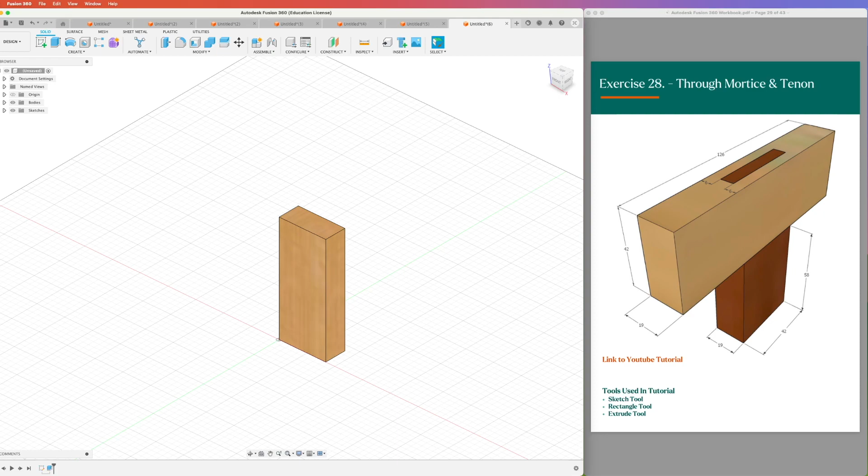So starting with our bottom piece, we're going to draw our rectangle at 19 and 42. We're going to extrude him up. And he's going to be 58 plus 42 high. And so that's our bottom piece. So I'm going to jump into bodies, right click and change his appearance now. Grab a darker piece, put him on there.

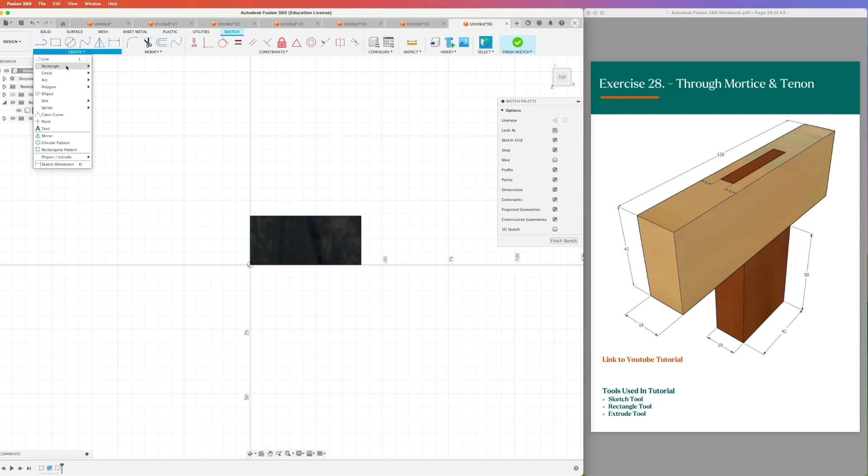I'm then going to use my tenon to cut out the mortise. So I'm going to sketch off the top here. I'm going to grab my center rectangle this time because it's a lot easier to draw from the middle out. We're just going to approximate the middle. And he needs to be 19 wide and 126 long.

Now he doesn't line up yet, so we're going to coincident this line with that corner. And then we're going to create the middle of this rectangle from the edge, needs to be 21, or 42 divided by 2. So now he's perfectly aligned in the middle. And we're just going to go and add

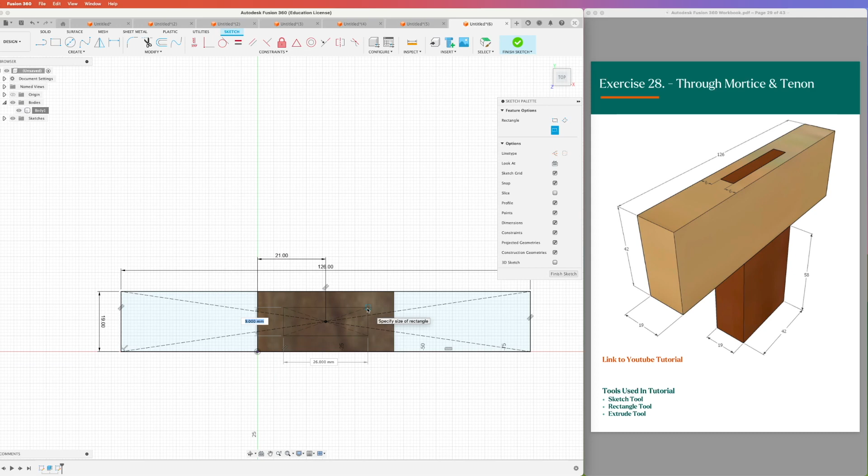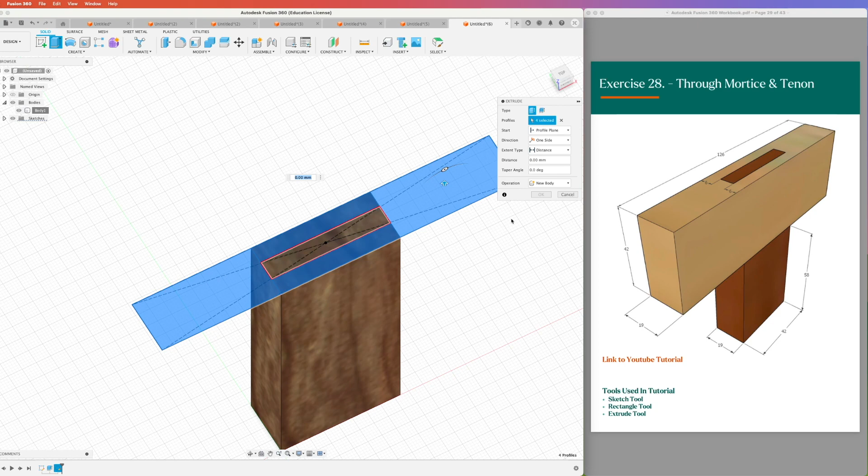our mortise rectangle now. So if I grab that, our mortise is going to be 42 long, and it's going to be 19 minus 6 wide. And so there will be my mortise. So when I extrude this, I'm going to choose this rectangle, extrude this one, and this one. And we're going to extrude down minus 42.

And we're going to create a new component. I could create a new body and then turn it into a component, but I might as well just create a new component and click OK. I'm then going to right click on body 1 and click create component from body. And now I have 2 components. And they're not actually assembled yet. So if I grab this and move it, you can see it'll go wherever it wants to go.

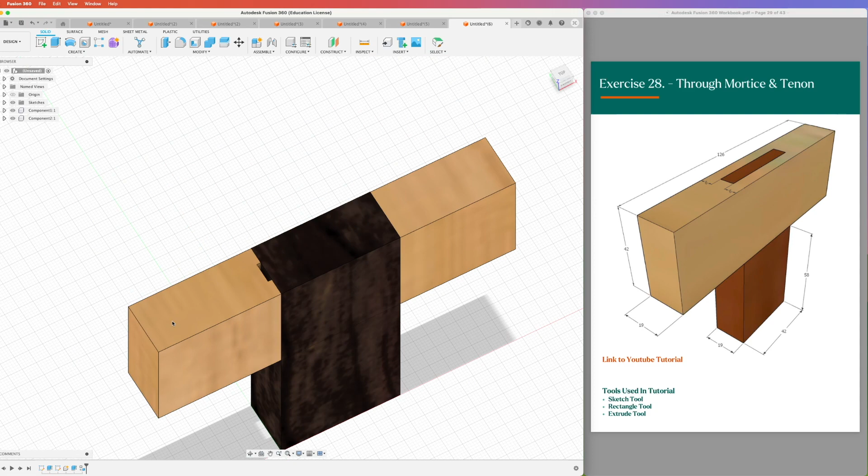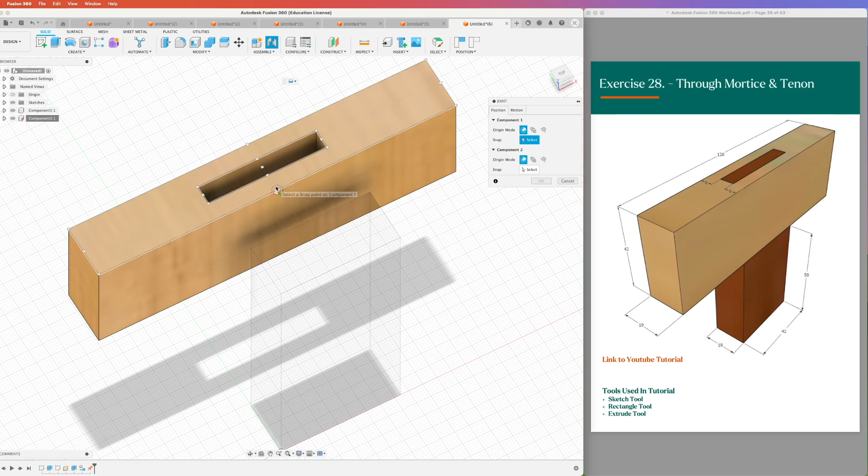So what I'm going to do is I'm just going to click on component 2, which is my dark piece. Right click and click ground. So he's stuck there. I'm then going to join this one to that one. So if I come into joint, I need to find some pieces that can line up. So I think I'm going to line up the outside edge facing up. So blue facing up in the middle of this piece with the outside edge in the middle with blue facing up.

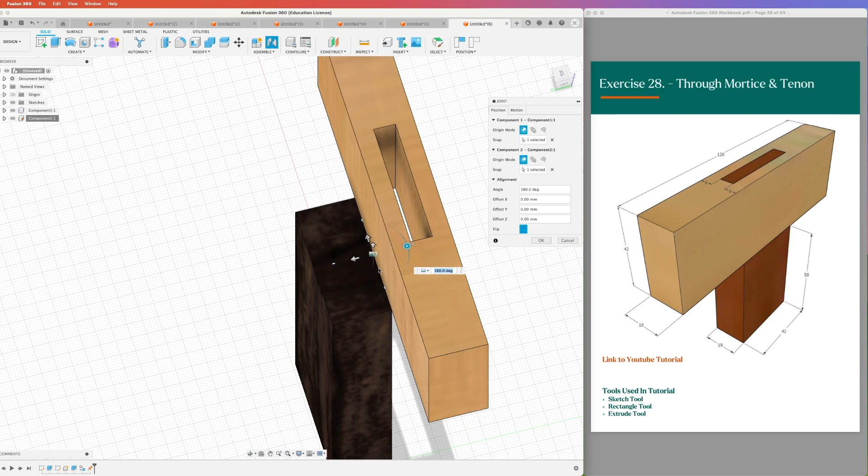Now you'll see what it's done there. It's flipped it around the other way. So if I click on flip, it'll flip it back. And so those 2 edges are still lined up. It's just that they can line up this way, or they can spin around 180 and line up this way. And so we're going to click OK.

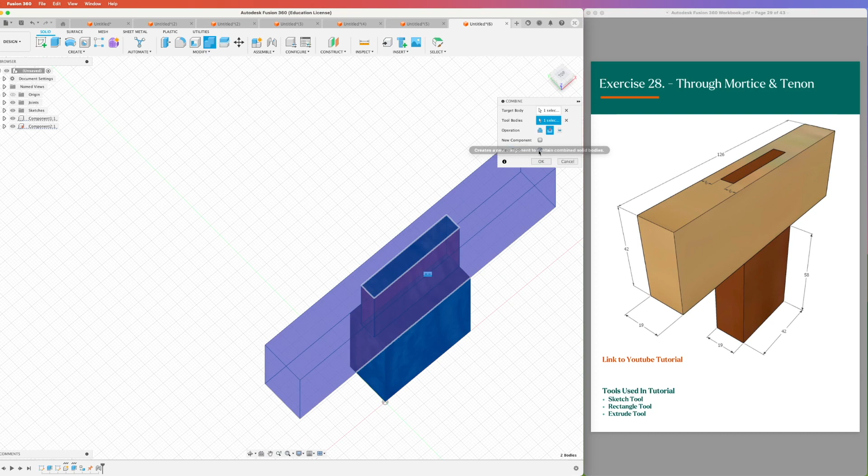Now the last thing we need to do is do our combine so we can cut out our tenon using our mortise hole. So combine, my target is my dark piece, is the one I want to cut out of. Using my light piece, we're on cut, and we want to keep our tool, so click OK. And now you'll see when I turn off component 1, I actually have my tenon cut out of my dark piece. When I turn off component 2, I have my mortise cut out of this.

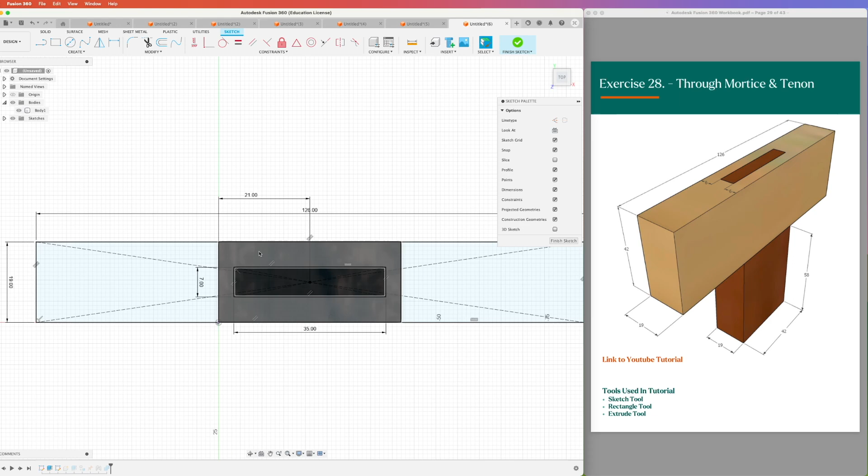Now the advantage of doing it this way is that if I go and change the dimensions of my mortise and tenon, it'll automatically update. So if I come back into this sketch, I could say, oh, I actually want it to be 35. And I actually want it to be a little bit bigger, so we might go with a 10 mil. Finish my sketch. There's my mortise, and my tenon has automatically updated as well. And you can see it's cut away the ends this time as well. So there is exercise 28 completed.